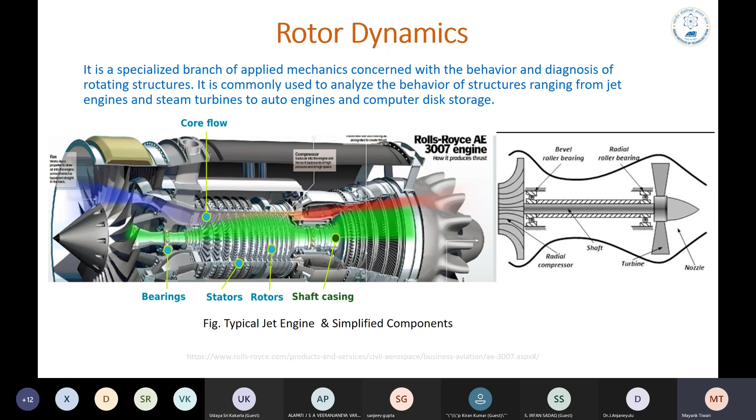So the understanding of nonlinear dynamics in rotors assumes a huge form. Just for a little history, this is from my great master from India, Professor J.S. Rao, late Professor J.S. Rao of IIT Delhi, who guided me on a number of things and guided many people. I have taken this from one of his last lectures with us. He passed away last year.

Rotordynamics history starts from even before Rankine. We all know the name Rankine, 1820 to 1872. It actually started with human beings in Egypt when they started rolling huge logs of stone on wooden logs, so you had something rotating. Rotordynamics started there. But then around 1800, when industrialization was happening, scientists like Rankine studied the rotor.

Then almost in parallel, but after that, was De Laval in Sweden. There is a huge controversy on who made the first power turbine, but De Laval had a huge contribution in terms of the turbine and the rotors. And these were moving at very high speeds, 10,000 RPM at that time. You can see he was born in 1845.

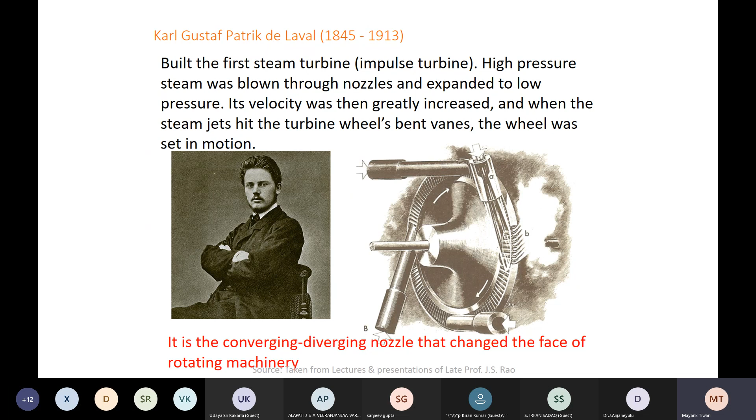By around 1913, we had a very high speed turbine. What happened was that at that point of time it was running, in fact if you see, by 1883, 40,000 RPM. So we had gone to very high speeds at that time.

But when he did this analysis, he found that the displacement of the rotor has this in the denominator, and this can go to zero. This is the running speed, this is the stiffness, and this can go to zero. If we don't avoid this, you can have an infinite displacement. So at that point of time, it was assumed that no system can run beyond resonance, which is what this formula is telling us.

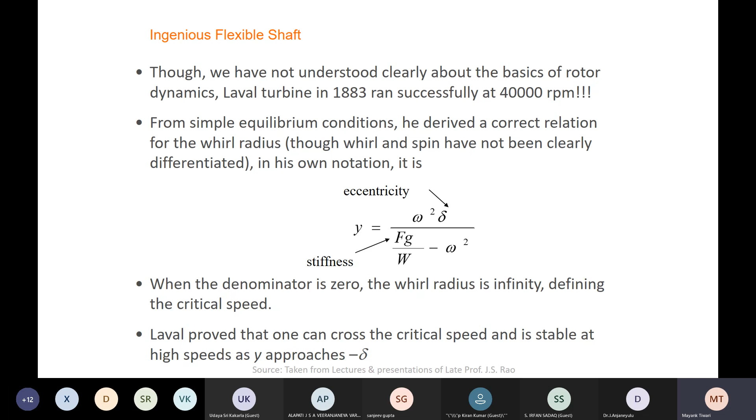It's interesting to understand that many things we take for granted now as impossible in the world may become possible after 50 years. The same thing happened there. In 1883, 40,000 RPM, people must have been running around, huge, very fast thing. Now 40,000 RPM we can have in small machines in the house also, almost, not exactly 40,000. But the point is that technology is growing. Our knowledge, such as what we are discussing now, can lead to the impossible becoming possible at some point of time. But in the 1800s this seemed to be impossible.

Then Parsons, in 1884, at the same time, made one of these turbines. This is another Parsons turbine which you would have seen. What they were looking at was, of course, to avoid the natural frequency, otherwise the amplitude was going high. They wanted systems with low noise and more power production, more torque, and they had to drive a generator basically.

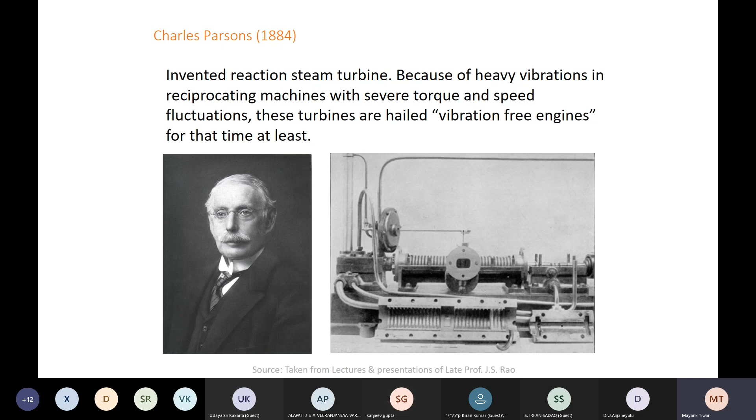So then Edison came along, and of course he set up General Electric and did a lot of things in terms of producing DC. And then there was the controversy of AC with Tesla. But now, one of these contributions was actually electrifying the streets of New York with this turbine and generator. A huge amount of analytical work on rotors was done at that point of time to get these systems running for a long time. It was, I think, called Jumbo, named so, the constant voltage dynamo.

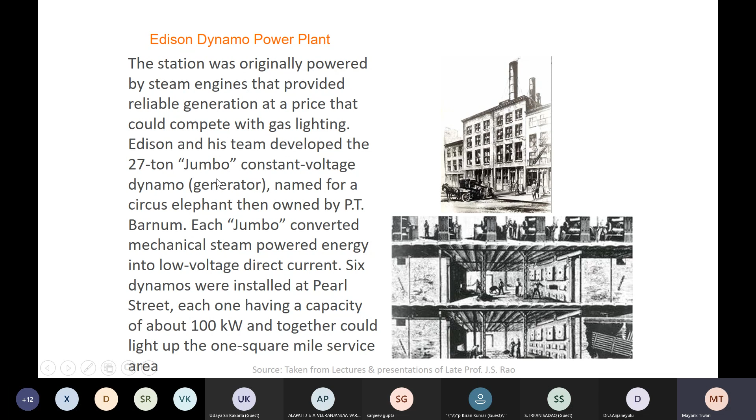This dynamo, this is the picture of that, and this is one of the earliest rotors, a full scale industrial rotor, set up by Edison. And then, of course, in the 1900s technology reached huge levels, and there was a lot of work being done in mathematics in Europe, with things moving very fast.

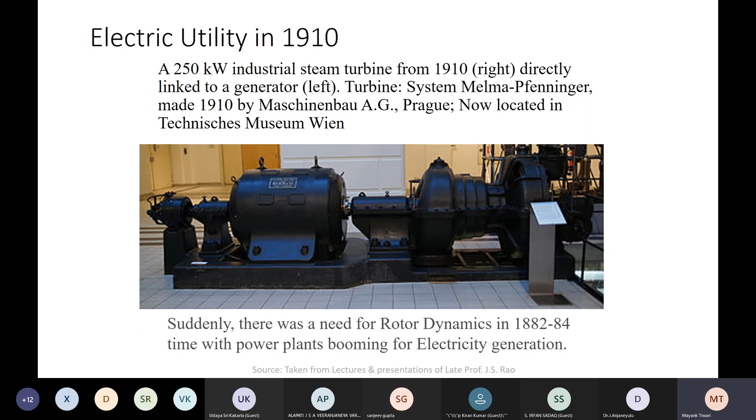One of the bad byproducts was that we started fighting, and there was the First World War and Second World War. It's not good, but we have to really accept the fact that a lot of technology we use now developed through those wars. Hopefully, with this awareness, in future we can develop technology that is not developed through war. This is actually the pivotal philosophy of our country, though we might have forgotten it because we are overwhelmed by American English and Western philosophy as such. But the point is that technology, and rotors, developed through the First and Second World War.

And then you had steam turbines through the 20th century. You can see huge steam turbines. I'm sure if some of you would have visited BHEL or a steam plant, they are being made in India also.

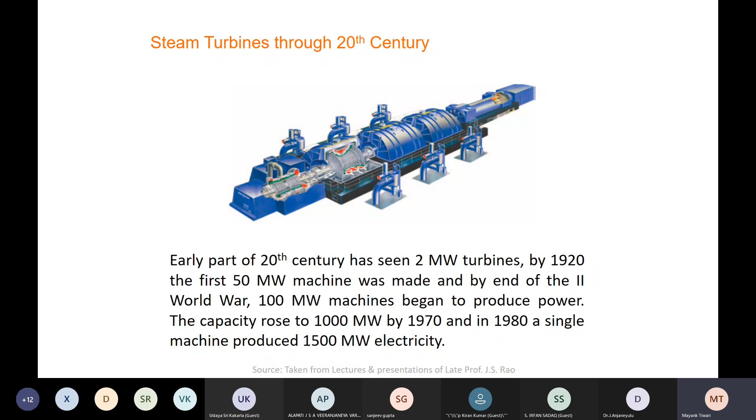And they're of 1500 megawatts, the huge turbines which are running and which need very critical rotor dynamic analysis done. Otherwise, we will have huge amounts of failures.

So we have to appreciate the fact that even in very normal things like motors, it's important to have a rotordynamic analysis, else you're going to have a failure.

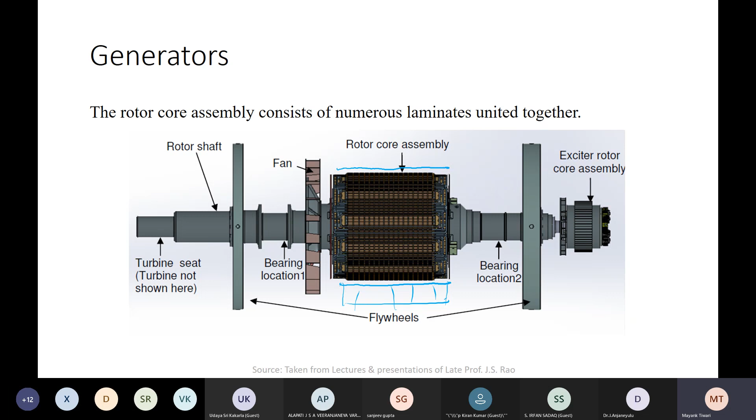Otherwise, it will expand and close the clearance, and you will have huge nonlinear effects due to rub between the rotor and stator, which we are going to discuss in detail in the models later. So, design of a motor, a huge part of it is rotor dynamics.

Then, of course, came 1941. Again, as I said, the war, the Second World War, led to the development of the first jet engine in United Kingdom by Sir Frank Whittle. It's very interesting that although this engine was developed in UK, industrial production of the same kind of engine with the technology developed by Frank Whittle was actually done in United States of America by General Electric.

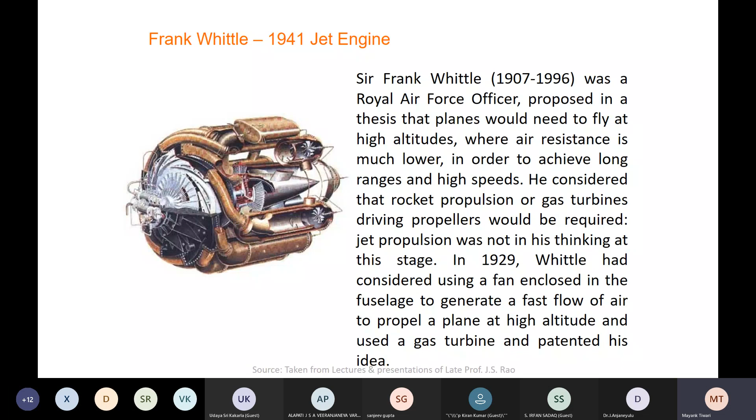So the rotor dynamics actually came of age. Very high speed, very critical, because you can't have it fail up in the air. People will lose life. And then all those developed into these jet engines which we see now.

So this is the Rolls-Royce RB211. Then there is, of course, the GE engine. There is Pratt and Whitney, and a huge amount of technology. You can see the very complicated rotor stator here. There is actually rotor inside a rotor, multi-spool rotors which are there.

And then there is a cantilever part to this, especially the blades which you see here, which you can see if you're boarding an aircraft. These blades, it's like a cantilever rotor with very, very small clearance here. The clearance is almost the size of a hair.

And now if you have vibration going up, you will have these blades running at about 2000 or 3000 RPM, not more than that. They are very huge. They will touch the case. And of course, there is design done to prevent the failure. There is an abradable which is put there, which abrades on touch. But the touch itself is a huge nonlinear dynamic event which will create failure.

And in fact, I will show you a photograph of a failure which happened last year, where the whole engine - there are lots of videos on YouTube where that huge engine just broke apart, a 777, and it was dropping down on the ground on roads and houses. So these are very critical things which have been made.

And the steam turbine, you can see this huge rotor here. This is the generator here. This is the turbine, different stages.

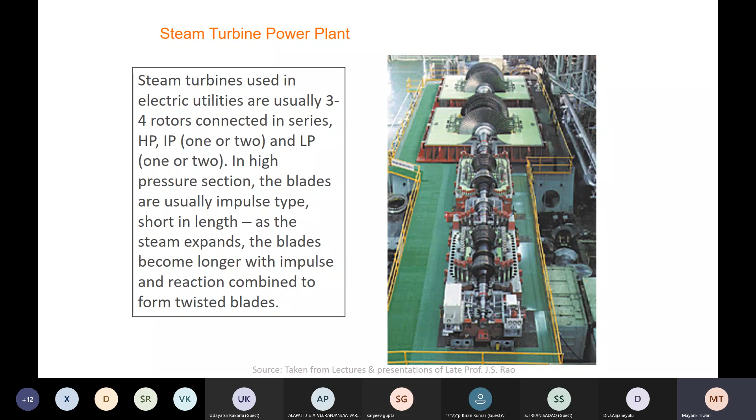So this is again another challenge, but it is interesting that a lot of work has been done to overcome all this. And this is the work, fundamentally, which we are going to talk about today. Now you can see this kind of analysis which has been done on ANSYS, and this is, I should repeat, a slide from late Professor J.S.

Rao's presentation on ANSYS is used to find the deflection and the mode, showing where the blue part, which is the rotor, can touch the green part, which is the stator.

Anyone who's used ANSYS for these kinds of simulations understands how critical damping is. This is a huge exercise in simulation of aircraft engines, because if you don't put the right damping, you might overestimate things.

Then the factor of safety will be very high, and you will have very heavy engines. Heavy engines mean more fuel, more fuel means less money. So that's another fact of life for engineers - we can do a lot of things, but we have to be careful and stay within our budget, otherwise we won't be good engineers.

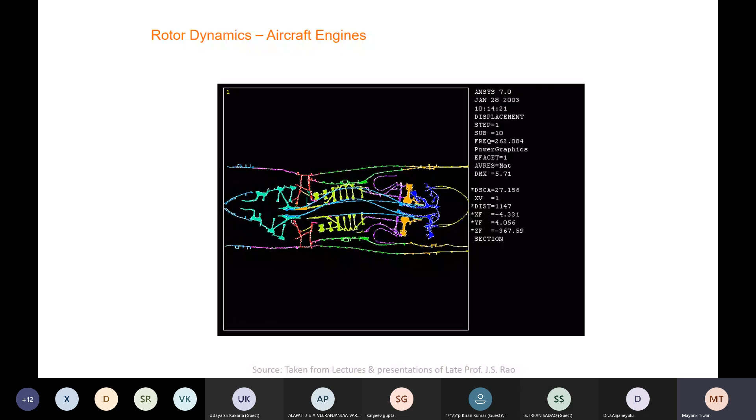That's the whole point of industrial engineering - the engineering in industry. These kinds of simulations have to be cross-checked with a lot of experiments before you can actually finalize a design.

Now, picking up some very interesting things from his presentation - this is the cryogenic spatial pump for the GSLV which India has. This is interesting because this turbo pump is actually pumping liquid oxygen and hydrogen. We're talking of minus 180, minus 173 degrees centigrade, so the bearing and the rotor are actually facing temperatures of minus 173 degrees.

And this is at very, very high speeds - it can go to 50, 60,000 RPM or even 1 lakh RPM, facing such low temperatures. So the rotor has to be designed for this. The life of these pumps at this point is just 2 minutes, because the cryogenic stage actually just survives 2 or 3 minutes in space, and then it is ejected out.

But a lot of work is being done to try to resalvage this, because it's a very expensive thing and we are just throwing it out. That's why space technology is so expensive.

So the bearing needs oil and material which can run at such high speeds and low temperatures. It should not fatigue, because most metals at that low temperature will just harden up and crack. Obviously liquids will just freeze up, so you can't use normal lubrication like oil in this.

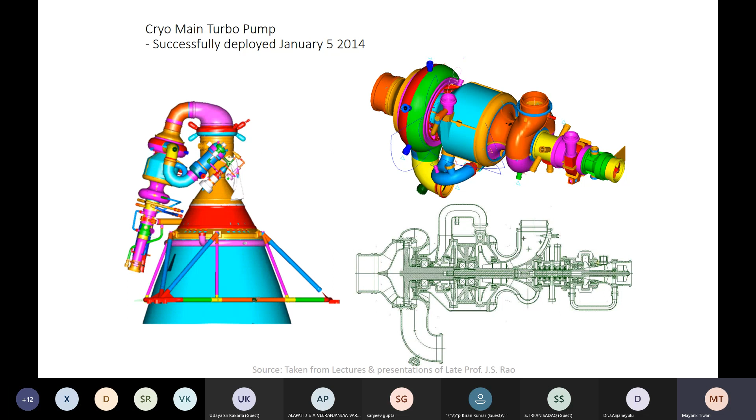So the whole rotordynamics and tribology of this kind of rotor is very important work being done in India. We have a cryogenic stage for the GSLV with us now - this GSLV is, of course, a huge thing which has been accomplished in India.

This is a photograph which I put from Professor Rao's presentation, showing where the stage is, and it is performing very well. We unfortunately had one failure just recently, but otherwise we've had very few failures of this stage in India.

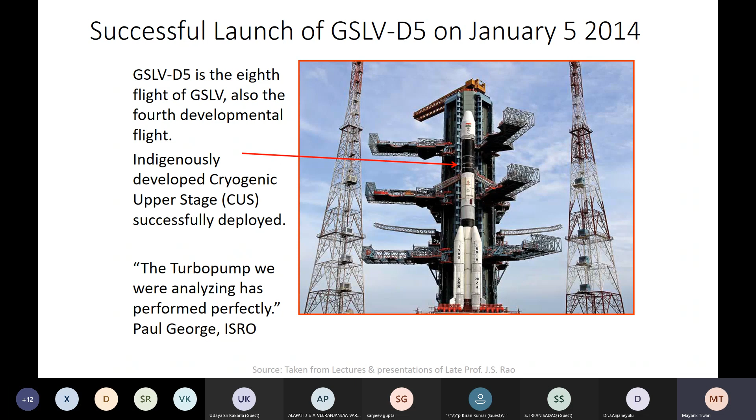You can see these stages as they go - the liquid stages here, the cryo stages here. This is one of the last stages. The liquid hydrogen and oxygen actually mix to produce the thrust, and when liquid oxygen and hydrogen react, they produce water - so that thrust's output is water.

It's high up in the atmosphere, and then it is ejected out, so we lose out on that very expensive technology.

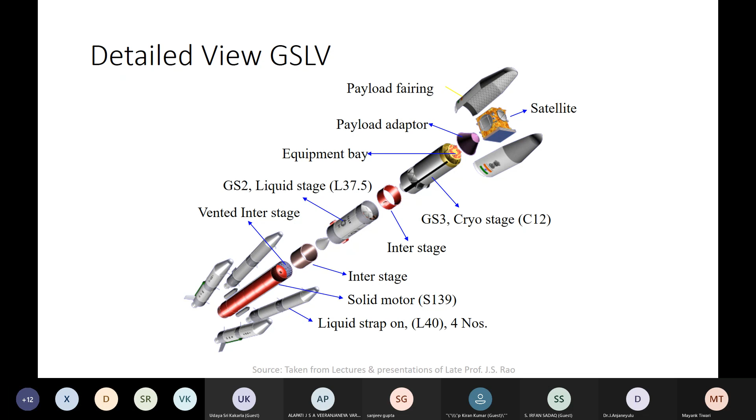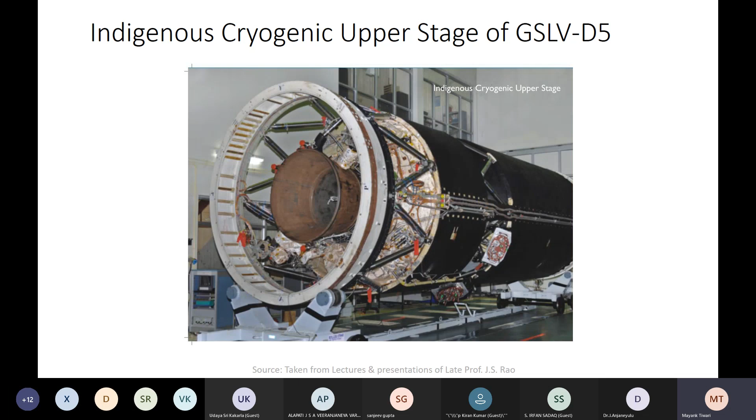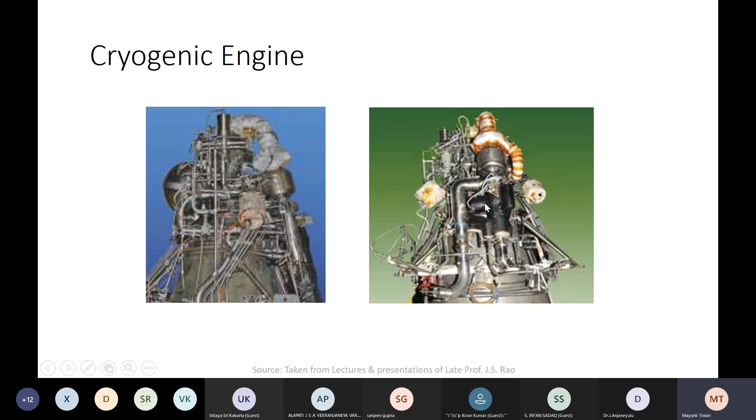These are more photographs, and it's interesting and enlightening for all of us to see these kinds of technologies being worked on in India, especially in rotordynamics. More photographs from the cryogenic stage show the complexity of the fuel and other systems - it's not just a simple rotor, there's a lot inside it.

And then there's a test bed for that, where these tests are done at ISRO to find out the thrust and the safety of the whole engine.

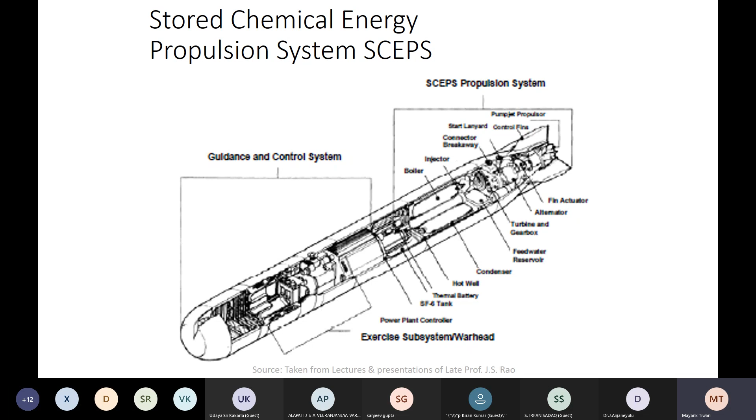As I told you, there's a lot of other work being done. For example, this is actually a torpedo for the Navy, where they use these rotors to propel the torpedo. This is another critical stage, called the Shakti torpedo, which has an impulse turbine inside it. So we get some idea of the history, the importance, and what's being done in our country.

But the FAA standard has gone through so many tests and design that the whole engine is designed to sustain these events, and the engine should not fall off. The cowling and casing fell off, but if the engine itself falls off, the whole aircraft will go through a huge unbalance and might crash.

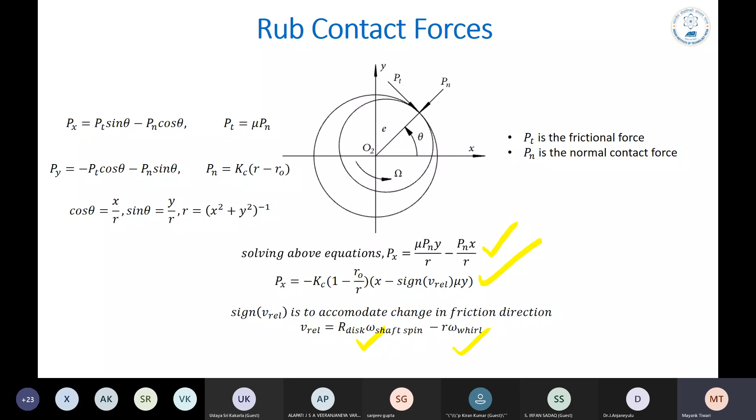But it is also whirling, like the Earth going around the Sun. So these two combine to give you V-rel, the relative velocity of the rotor with respect to the stator. Now when you put that here, going back to this equation, you will get this V-rel.

As you can see here, V-rel is in this term, in this equation. The sign of that will give you the sign of the friction force, which is mu y. So we now have a set of equations.

The problem is that this Heaviside function has an issue. It has 0 or 1 as its value - it's 0 when the rotor is not touching the stator, right? There is no touch, there is no very high stiffness, so that term is 0. But once it touches, it becomes 1 and that term comes in.

So this 0 or 1 actually causes very strong nonlinearity. It is the on and off nonlinearity, switching on and off, which is introduced. And this has no analytical solution, as we know with nonlinear equations.

So is there some way we can make it analytical? Number one. Number two, because of the non-analytic nature, we can do only things like solutions with Runge-Kutta method, which actually introduce inaccuracy, and they are not trustworthy till we verify them experimentally. So this discontinuity leads to very high computation times and leads to inaccuracy.

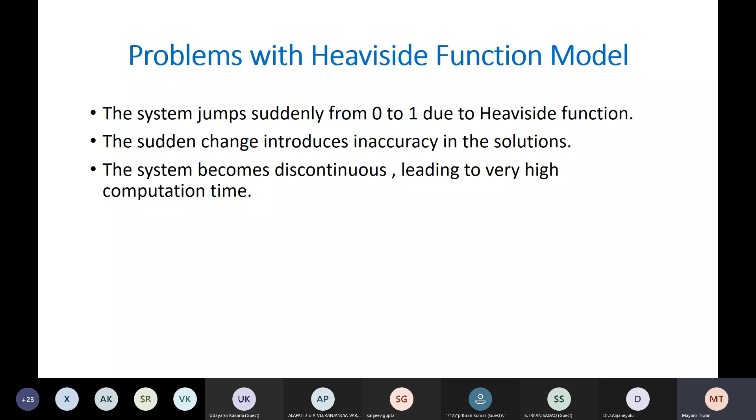So one of the problems we worked on is to make these functions into some known analytic functions. One of the known analytic functions - and I'm not saying this is the only one, there are others also - is the tan hyperbolic function.

So one of the things was to study if we can put this smoothing function into our equations and see if we can have a model where we can do it analytically, or which can take less computation time.

And then we see that very high k, at 1000, is when we get this. So this is an exercise which was done. We published a paper on mechanical systems and signal processing on this - that if we have a very high value of k, we have a configuration of this term which is analytic and takes less time.

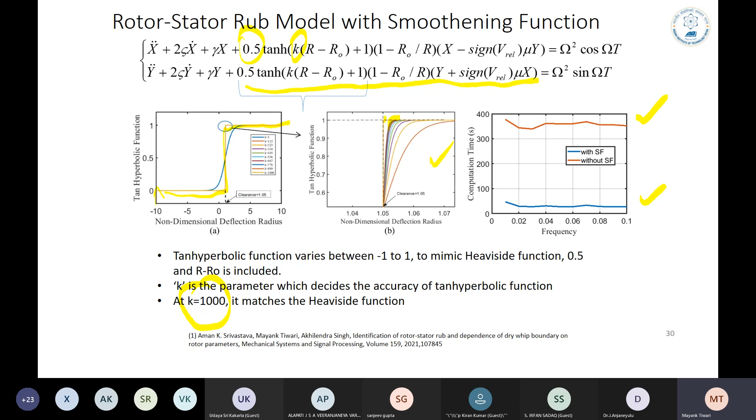So the point is you have to be very careful, because sometimes by using a smoothing function you can lose out on information about the nonlinearity. So the smoothing function has to be optimized for this kind of problem. So now, what is the result of all this?

This partial rub will create a condition of this orbit, where the rotor will touch the stator and come back. So there is bouncing taking place, and this creates this kind of orbit which looks like an annulus, a circle within a circle. It is actually the rotor moving, bouncing off the stator, coming back again where R is less than R0, then again it goes back and hits the stator. So this is partial rub, and what it shows us is the frequency spectra.

But the important thing here, for this frequency spectra also, all three, is that you can see the frequency which is zero here, and it is positive till here, and there is a negative side to this frequency. This is a special thing used in rotor dynamics, and it's called a full spectrum.

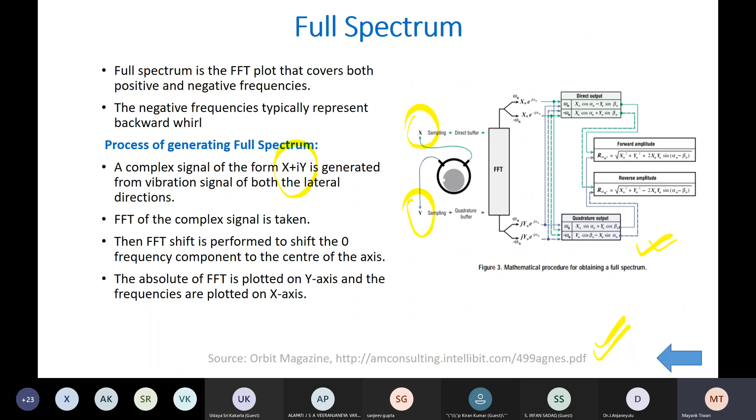This X and Y can be put down in complex form as X plus iota Y. Then the FFT of the complex signal is taken, and then FFT shift is performed to shift the zero frequency component to the center of the axis, and the absolute value of FFT is taken, and then you get a full spectra.

What it tells us physically, the important thing is that if you have components on the negative side, which is the backward whirl. Now what is the backward whirl here? You see this frequency, this is on the negative side. That means the rotor is vibrating with a negative motion, it's called a reverse whirl, and this is pretty prominent, but it is less than the forward whirl, which is the positive side.

So you will not have a net reverse whirl. You will have a net forward whirl, which will not be as strong as in this case, because it is being reduced by the backward whirl.

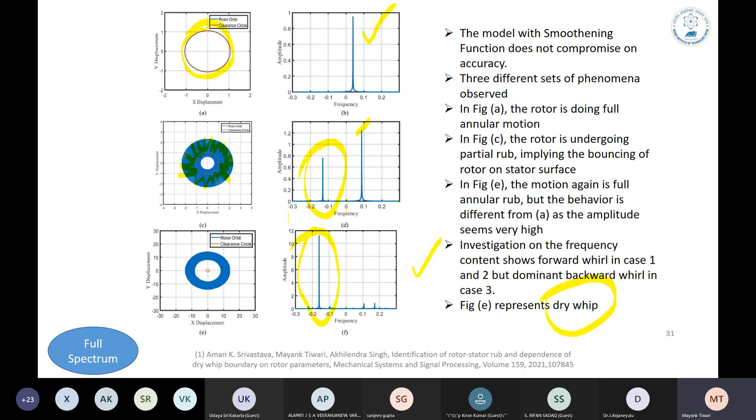Now when you have full rub, which is the third case, that is when the rotor completely touches the stator at very high amplitudes and it doesn't let go. There's no bouncing actually, then you will have a net backward whirl because you can see a strong component of reverse whirl which is happening, and this is called dry whip. This is a term used during rub of the rotor with the stator, it is called dry whip.

Now this is analyzed using one of the methods we've used, the adaptive chirp mode decomposition, which takes the time signal, and what we know is that there is frequency modulation, not amplitude modulation. So there is frequency modulation, and we have to find out what frequencies are modulating. This signal processing method finds out the modulation and how the frequency is changing with time. So this is an estimate and this is the real.

When this difference goes to zero, this function is minimized. So if we minimize this function for a given frequency, we will know at a given time what that frequency is.

Just for a little understanding, what is frequency modulation? If this is time and this is amplitude, frequency modulation would be if the time domain plot would be like this, closer, then again further apart. This is frequency modulation because at some time you have one frequency, at another time you have a larger frequency. This is different from amplitude modulation, which would be the same frequency but the amplitude modulating.

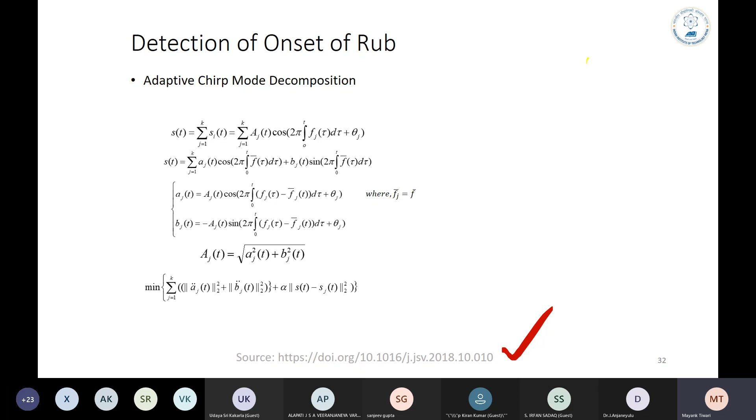This is taken from good work published in the Journal of Sound and Vibration. This is not our work, we've taken this for using it in our rub model.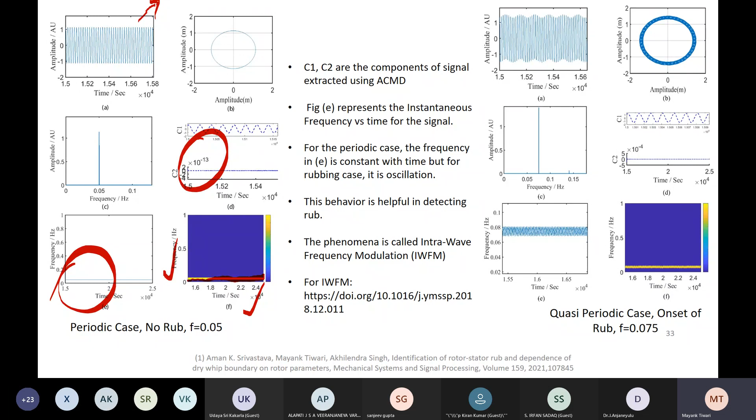So how do you find out a system has become unstable, especially a nonlinear system? One way is by Floquet theory, which many of you would have done. If you have the time domain response, you perturb it by y(t). This perturbation gives us a new equation in state space form, and you run a Runge-Kutta on this with the initial condition as the unit matrix of the size of this state space, and then get this, which is called the monodromy matrix.

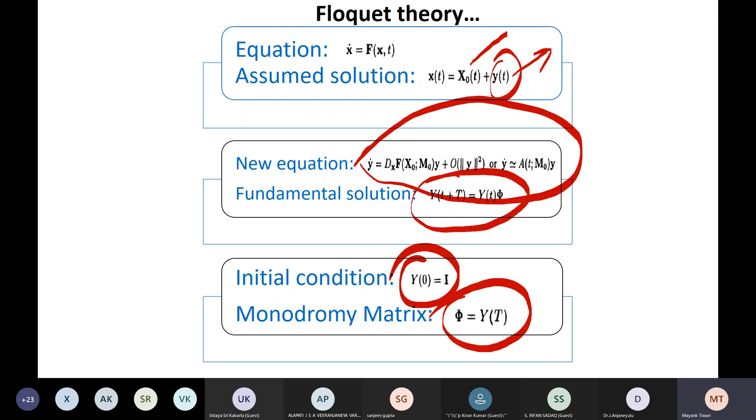The eigenvalues of this matrix, with the initial condition as the identity matrix of the order of the state space system, give us phi. The eigenvalues of phi now give us the idea of stability. This, in a nutshell, is the algorithm for stability analysis of nonlinear systems. The eigenvalues of this monodromy matrix are called Floquet multipliers.

They tell you whether your system, which you can see plotted with X and Y vertical, is running in time, and this dimension of time is very important for us in dynamics. So any orbit, if I draw another picture, the orbit of a rotor would be like this - it won't be a closed circle, but a spiral. When you see it from this side, you will see a circle, or two circles, which tells you there's another frequency.

So this Floquet multiplier is telling you that at any instant of time, if this starts increasing, it starts becoming unstable. This gradient of change is the orbital convergence or divergence, which comes out from the Floquet multipliers. After we find the eigenvalues of the monodromy matrix, if they lie within a unit circle, the system is not diverging, it is not unstable. If it lies outside the unit circle, it is diverging and becomes unstable.

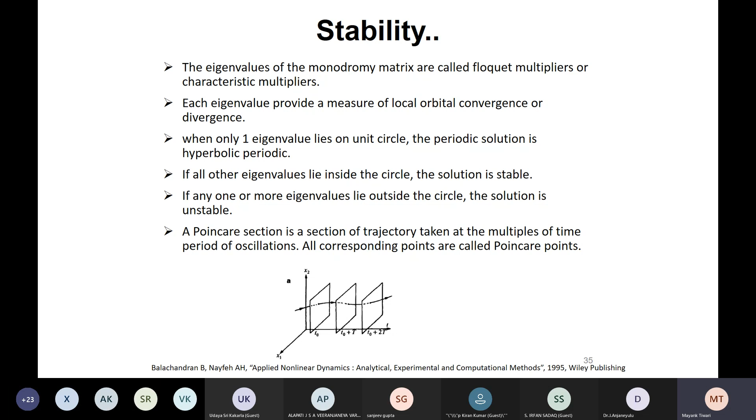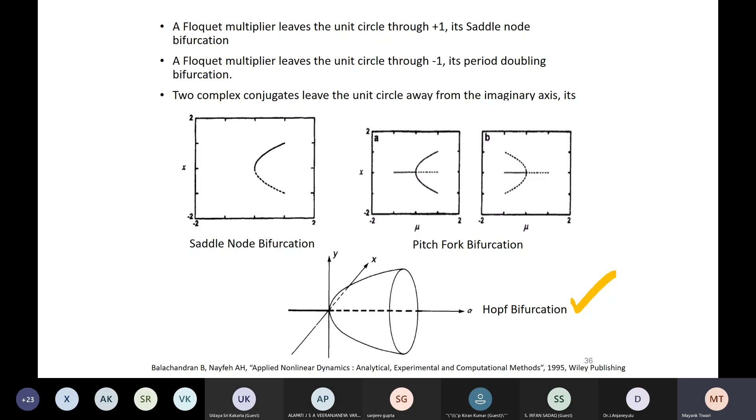So the conditions in the algorithm are: if the Floquet multiplier leaves the unit circle through the plus one side, it's a saddle node bifurcation. If it leaves through minus one, it's period doubling. And two complex conjugates leaving from the imaginary axis is a Hopf bifurcation - which is the case for us in the rotor stator rub.

So this is explaining the eigenvalues of the monodromy matrix, and if they go out through the negative side, you can see the complex conjugates there - the imaginary axis on the y and the real axis on the x. You will see a case of Hopf bifurcation, which on changing the speed or some parameters, will finally lead to a chaotic response.

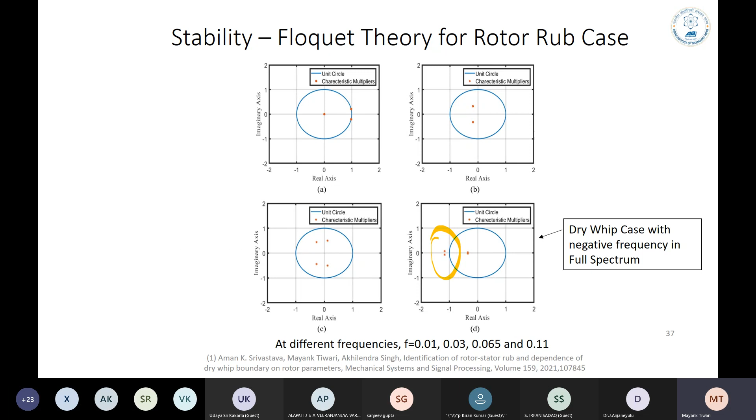These plots are actually from the results we've run for our case. The whole point of this study is that it's very important to avoid this kind of unpredictable behavior. Actually, chaos is in a way predictable, in a way unpredictable, but it's not a random thing, right? It's not noise - we should not say chaos is noise.

That is the problem with application of nonlinear dynamics in diagnostics. If you go into an industry and start talking about chaos, people get very alarmed because it is very difficult to detect chaos in general. And the second issue is most of the problems are noise, so they will say just reduce the noise, which is the amplitude, forget about chaos.

But there are industries like aircraft engines, the aerospace industry, where after you have reduced the noise, you have to study whether it is chaotic, quasi-periodic, or periodic, and then go and modify the design. So the whole purpose here is to study the chaos with the noise, and then increase the distance between the main frequency and the nonlinear frequency, which I showed, called the dry whip onset frequency - the gap between that is causing frequency modulation.

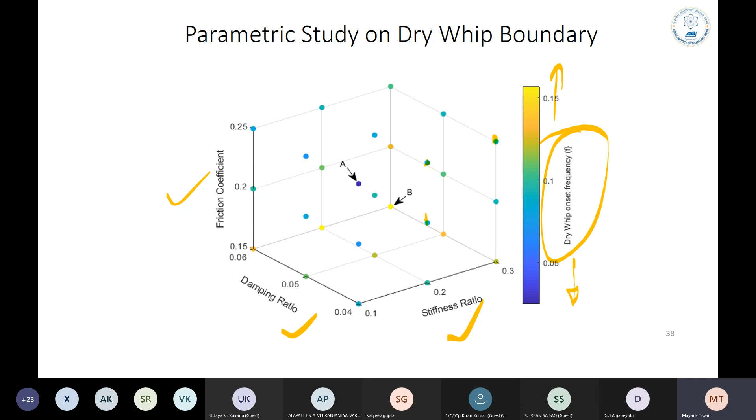So this is a very good 3D parameter plot which has been made by my student, who's published this paper, and it's a very good design handout for an industry where they need to have damping, stiffness, and friction coefficient for a rotor which can touch a stator, so that we can avoid unpredictable responses.

So, talking about chaos in nonlinear dynamics, we need to understand what is the effect of noise, and also how can you separate it. Separating noise from nonlinear response is very difficult because the usual methods of filtering will take the data you acquire, apply filters, and as a result, the nonlinear dynamics will also be destroyed. You will never come to know whether your system is quasi-periodic or chaotic because you applied a filter. You might have reduced the amplitude and said that everything is noise, but that is not true.

So this is another exercise which we are undertaking, finding out methods such as the 0-1 test for chaos, looking at the fractal dimensions, and then using some visual representation to see what kind of nonlinear response we are having.

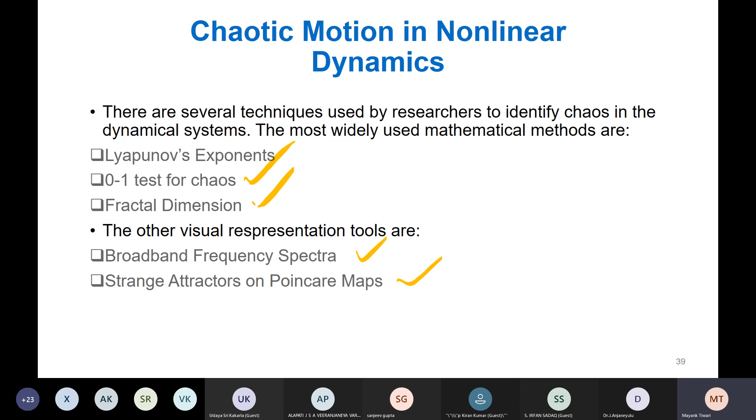So Lyapunov exponent, as I told you, tells you the convergence or divergence of the trajectory of the system in 3D in the real world. It is given by this exponent lambda. If this is positive, then lambda, the Lyapunov exponent, will diverge. If this is negative, it will converge.

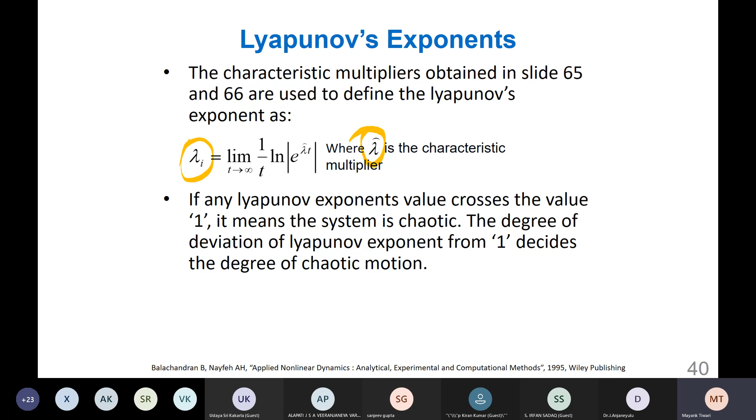So you can understand from the basic definition of stability, a positive Lyapunov exponent is indicating instability, and the larger the order of this Lyapunov exponent, the stronger is the nonlinearity. So if your Lyapunov exponent is something like 100,000, you have a highly chaotic system. If it is 1 or 2, it is chaotic, but it is not that strong.

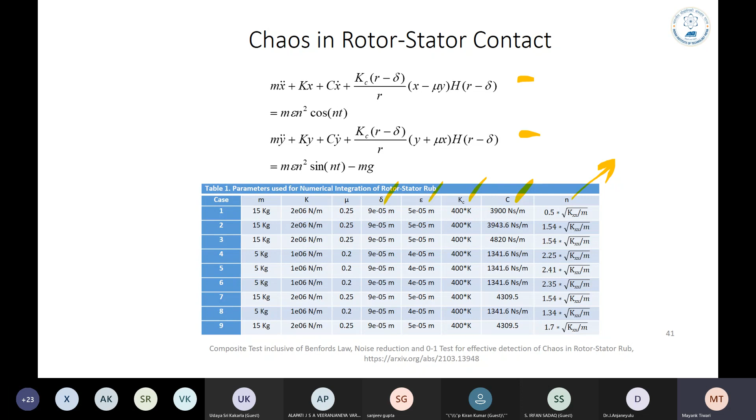Okay, so we took some parameters of mass, K, mu, clearance, the eccentricity of the unbalance. Then we took the stiffness of the stator and different values of damping and different rotational frequencies from these two equations of a rotor, and ran all these methods to find out what different kinds of responses we get.

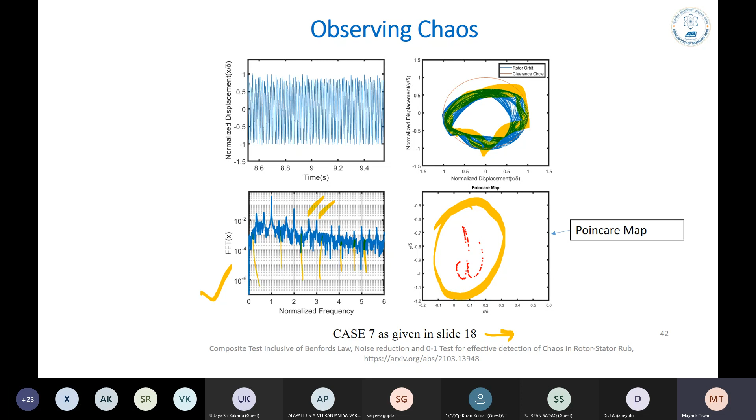Okay, this gives you partial rub chaotic motion where you have these prominent frequencies, but in between here you will see a band of frequencies. So many times, when you do this simulation, you will confuse this to be numerical noise. But actually, if you plot the Poincare map, you get the very characteristic fractal or layered structure of chaos. So this is a visual representation for the cases we ran for the chaotic system, and this is of course a simulation.

Now, as I said, when you do diagnostics of rotors and talk about chaos, people won't take that so easily, because the reality is that there will be noise in the system. So if there is noise with chaos, what are the systems to detect it, especially in algorithms? There's something called the 0-1 test, which is used in physics. Physics deals with a lot of applications where there is a huge amount of nonlinear dynamics, right from very huge scales in astronomy to small scales in atoms and subatomic particles.

So this 0-1 test was actually formulated in this paper from the SIAM Journal on Applied Dynamical Systems. It assumed that noise and chaos are the same, which is not a good assumption, of course, because that is what we are trying to differentiate.

But what it does is, if you have a given set of data, without going for very expensive Poincare maps — by the way, Poincare maps are very expensive because 1 million sets of data will produce one Poincare map, and a huge amount of computer resources are taken — can we just have time domain data, do some test, and find out whether it is periodic, noisy, or chaotic?

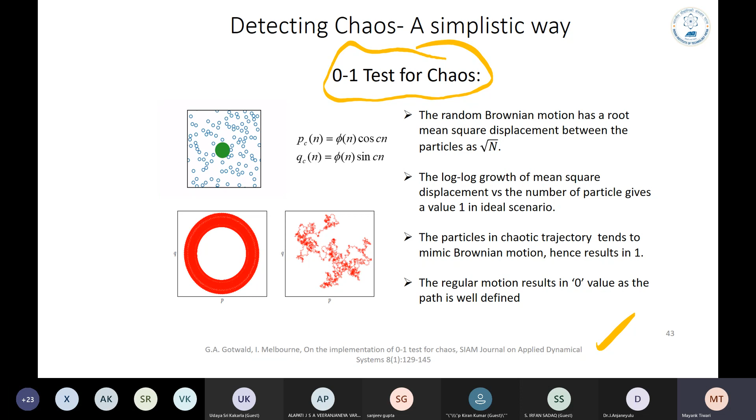So that differentiation, this 0-1 test for chaos does. If it is 1, that means it is either noise or chaotic. If it is 0, it is periodic.

When we do this test, the limitation is that we found a set where 1 means it is either chaotic or random with noise. The problem with this method is that if we have a periodic motion with noise, we will see something like chaos, but that is not true. This is a quick method of understanding whether there is chaos, quasi-periodic motion, or noise, but it is absolutely not sufficient for us because we can't equate noise with chaos. If we are trying to reduce chaos or quasi-periodic motion, we have to work on design features which are not the same as those for noise.

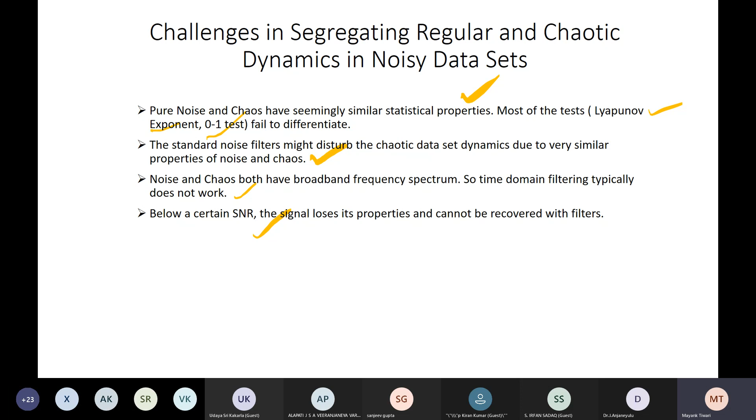Now we will try to work through the challenges. The challenges of noise and chaos are that they have similar statistical properties, and most of the methods we discussed, Lyapunov exponent, 0-1 test, fail to differentiate. The standard noise filters will completely destroy the chaotic data, and you will never be able to know whether it is chaotic or quasi-periodic. Also, they look the same, noise and chaos. They have broadband frequency spectra. Below a certain signal to noise ratio, the signal loses its properties and cannot be recovered with filters. This is the important thing.

So what do you do now? We do something called a composite test for chaos. This is another paper which has now been published in Nonlinear Dynamics from our side. We get the Poincare map and perform the 0-1 test. If it is 1, that means there is either noise or chaos or quasi-periodic motion. We find that out in this box, whether it is chaos, through this method which we will see in the next slide. We calculate the Euclidean distance, ED, and there is a certain box we generate, which we'll see in the next slide. If it is outside, it is non-linear.

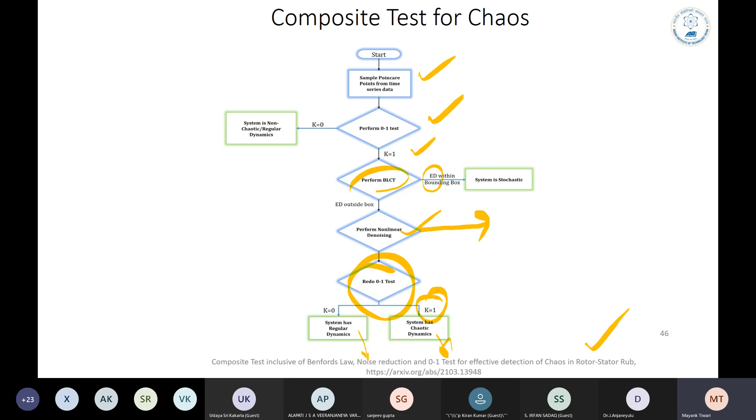Then we do nonlinear denoising. This is a method taken from physics, from Schreiber. It is called Schreiber's filtering for nonlinear systems. Then we redo the 0-1 test. Now this method renders the system data devoid of noise. Either it is chaotic or periodic. Once we do the 0-1 test now, if it is 1, it means it is chaotic, and if it is 0, that means it is periodic motion.

This is a method which we've applied in our algorithm, and that test is called the Benford's law test. Now this is an interesting method because Benford's law, you would have heard of it in the news for things like the American election last year where there was so much controversy. They were taking the data to find out whether it is actually noise or somebody's tampering. This was the problem in America, that one party was claiming the whole votes had been tampered with, something we used to hear in India some years ago. So then Benford's law, and this we found in a news report, they were applying Benford's law to find out whether it is noise.

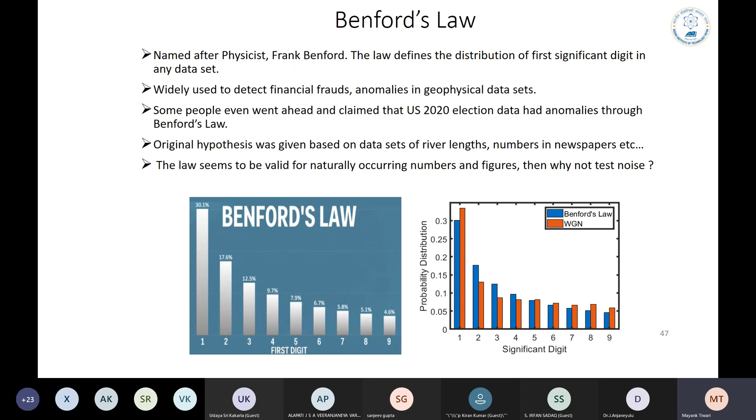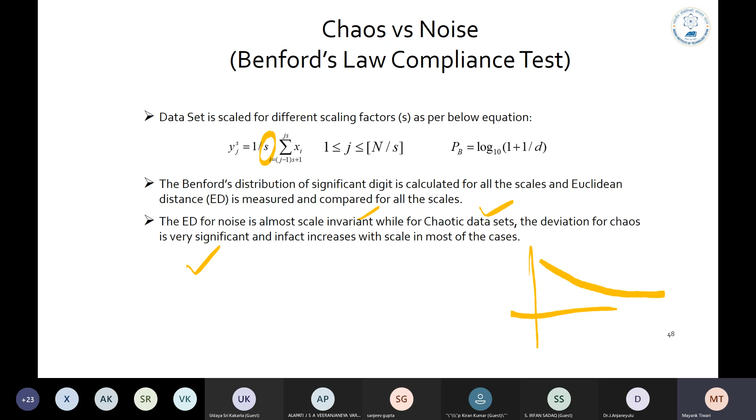So we applied this Benford's law on our noisy data. What this method tells you, and you can easily go back today and check this, it's a very simple law being used, is that Benford's law, if applied on noise, is scale invariant. So if this scaling is done at different levels, you will get the same shape of the Benford's distribution, which is, as we saw in the previous curve, the amplitude falls down like this. The Euclidean distance for noise is almost scale invariant, while for chaotic data sets, the deviation is very significant and increases with scale. So Benford's law is another method for checking out if your time domain data from the rotor is noisy or has a chaotic set.

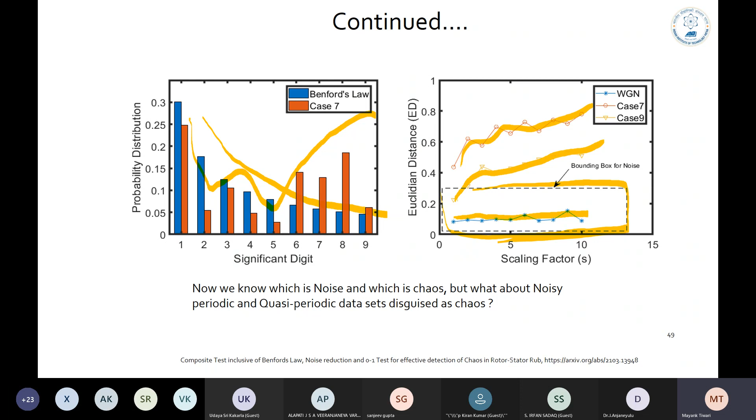Also, what we do is find out the Euclidean distance of these curves. If this Euclidean distance remains the same, scale invariant, within a box, this is called the box technique, then we say it is noisy data. But if this Euclidean distance changes with the scaling factor, scale variant, then it indicates chaotic data in your system. So this is another method, the BLCT method, which we've applied.

Then I explained to you about Schreiber's nonlinear noise reduction, where we have applied it to a Poincare map. As you can see, this is seemingly chaotic data. It is true that it is chaotic, but with this kind of plot it might look like some continuous curve also, but it is not. Once you do nonlinear Schreiber's method for denoising, you will get this fractal, layered structure of a chaotic response.

This tells you that we need to do nonlinear noise reduction not in the original data but in the Poincare. If you do any kind of filtering in the original data of the rotor, you will end up with completely distorted data from which you can extract nothing. So you have to be careful.

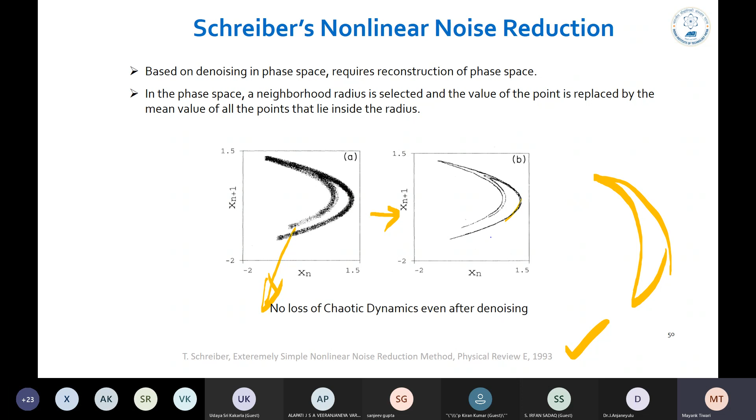Again, a method which is used extensively in physics, it's in the Physical Review journal. Okay, so here's an example. There's a Poincare map we got with noise. It doesn't give any indication whether it's quasi-periodic or chaotic.

We applied the denoising and we saw this. This is a quasi-periodic indication, a closed loop like this.

We applied it to another set of data and see what we got - a single point, which means that it is actually a completely periodic system which looked like some noisy, chaotic, or quasi-periodic system, but by applying this technique, this is...

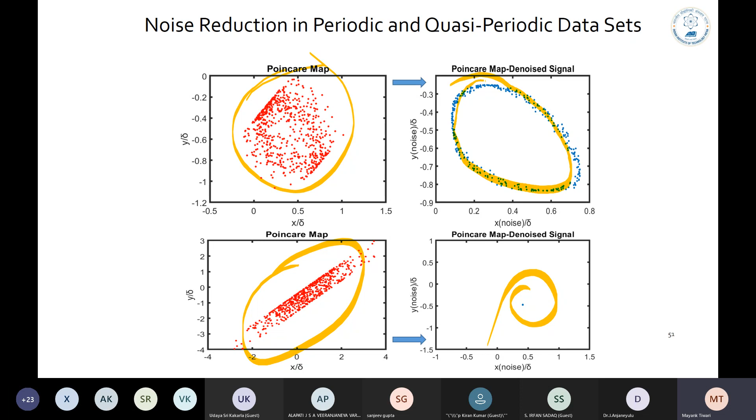Periodic. So this method also has to be used in condition monitoring of rotors for critical systems where we need to understand whether the system is quasi-periodic or chaotic. So if we sum up the composite test...

Then we have the Benford's law compliance test, the boxing which I told you - boxing means the bounding box - and then the 0-1 test, and then the signal mixed with noise. We need to do some nonlinear filtering of this.

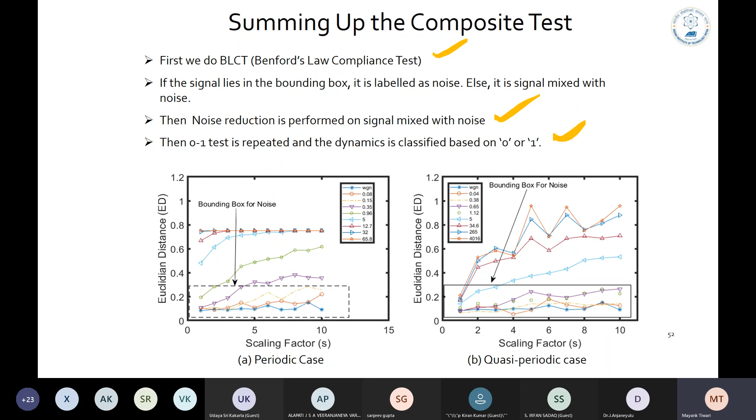Now there's a huge lot of areas where this is applied, not just for rotors, but components of rotors such as gears. Gears are systems which have time-varying stiffness, and this is a work I have taken, a slightly old work, but excellent work on gear dynamics, both theoretical and experimental, from Professor Kahraman of Ohio State University, where they have modeled this as a time-varying stiffness.

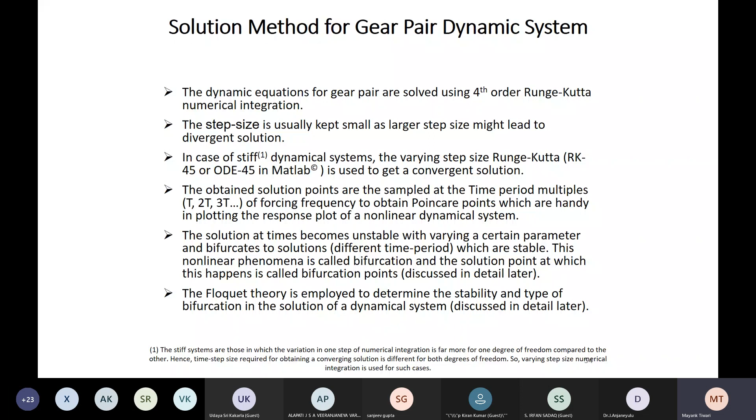This leads to huge issues in terms of the prediction of the response using the Runge-Kutta method, which, as I told you, will not by itself stand verification. It needs verification with an experiment or some other method. But this time-varying stiffness leads to, in fact, they've done some very good experiments also with this rig.

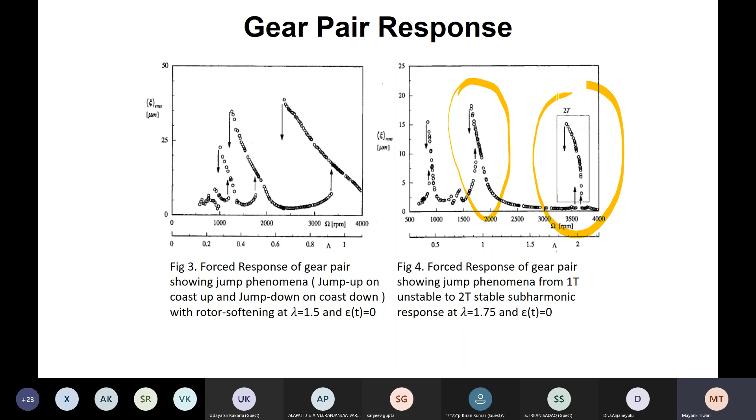It leads to the very interesting jump phenomena in nonlinear dynamics. They have shown this at different subharmonic levels. It is jumping, and you can see with great detail they have got the main frequency, the nonlinear frequency, similar to what we were getting in rub.

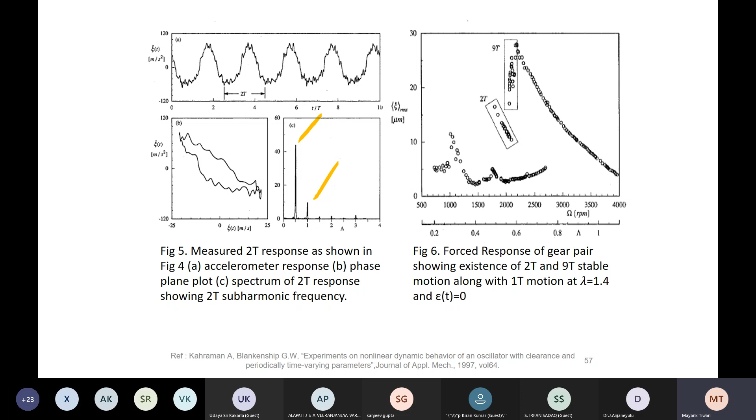Although rub is also a case of partial rub when the stiffness is changing with time. But this is a parametric system which we are dealing with, similar to a ball bearing system, which we'll just see. So this leads to a chaotic response.

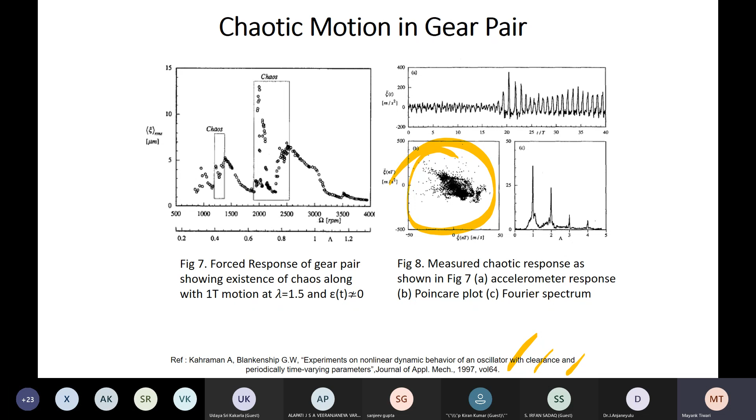And in 1997, no Benford's test, no 0-1 test, no nonlinear analysis - this has not been done, what we are doing now, in finding out whether this is really chaotic or whether this is quasi-periodic or periodic, maybe. It looks like chaotic - of course, you can see this frequency spectra, broadband.

So this leads to a very interesting thing in nonlinear dynamics of mechanical systems called intermittent chaos, which is very common for fluid dynamics. You open your tap slowly, a water tap, and you will see...

Very smooth flow, and then as you keep opening it, the fluid flow breaks, and then it again becomes smooth, breaks, again becomes smooth, right? This is probably an experiment you've done with your taps, or you would have thought about it. This is called intermittency.

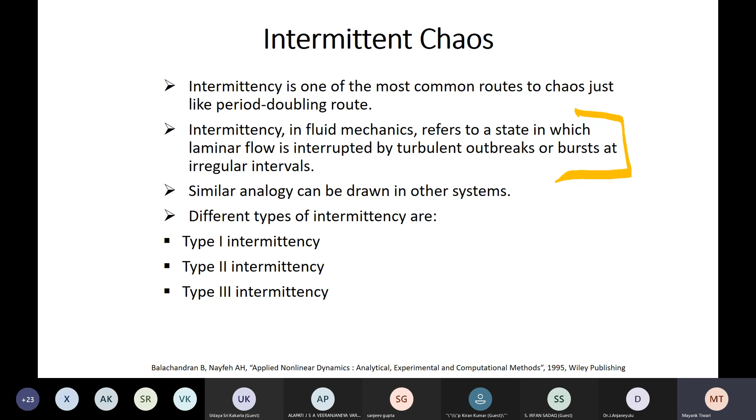So forget about fluid dynamics - even in systems like gears and bearings, it exists. You have a response where you have a chaotic response, then there's a steady state response broken by chaos, again becomes chaotic.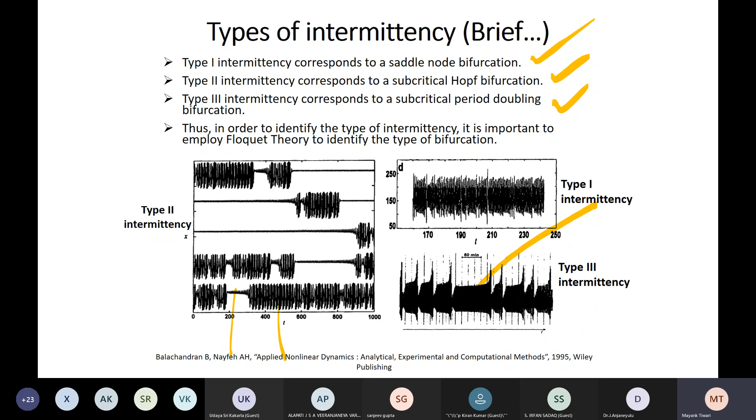So in time, there are different kinds of intermittencies which are defined from the Hopf bifurcation we were dealing with. This was detected by Professor Kahraman in gears, and I saw it in bearings from my own work some years ago, in ball bearings also, mostly from simulation.

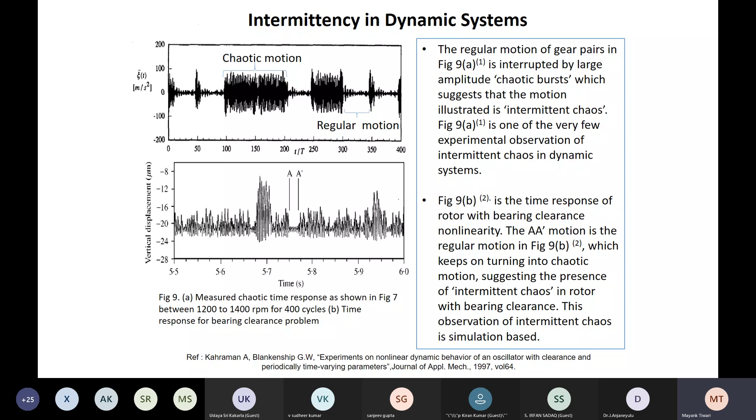You can understand from this kind of signal how much noise and vibration, and a problem in terms of fatigue life, this will create. So we have to avoid this. We have to avoid the set of parameters which results in this kind of motion. And this is true for ball bearings.

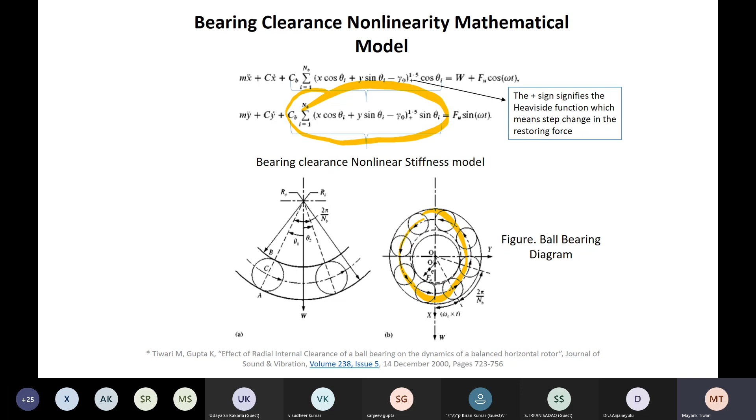This is my work actually some years ago, my PhD work. So you have these balls going around, and you get this stiffness which is a function of time, similar to the gear system, where it is a parametric system. We tested it with Runge-Kutta and the harmonic balance method.

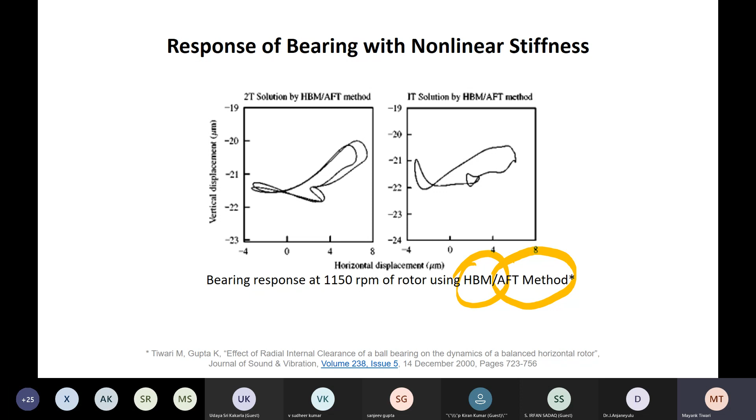So we saw intermittency theoretically in ball bearings. Now, going to some more application, sources of nonlinearity.

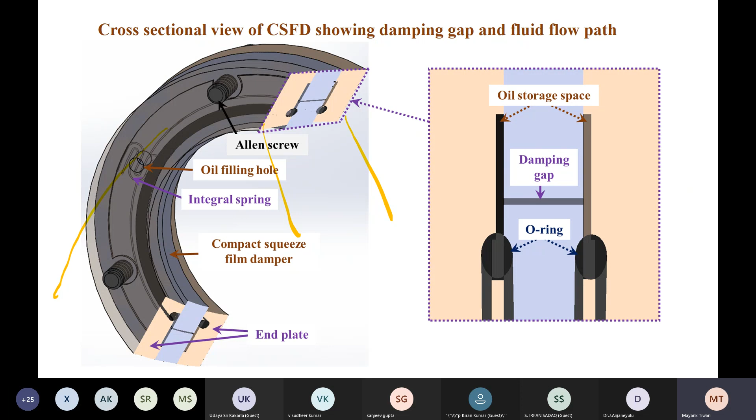We found that if you don't have the optimal clearance and thickness - this is the thickness, see the next slide, and the clearance is of course this small clearance here - if you don't have the optimum, you will get a nonlinear response.

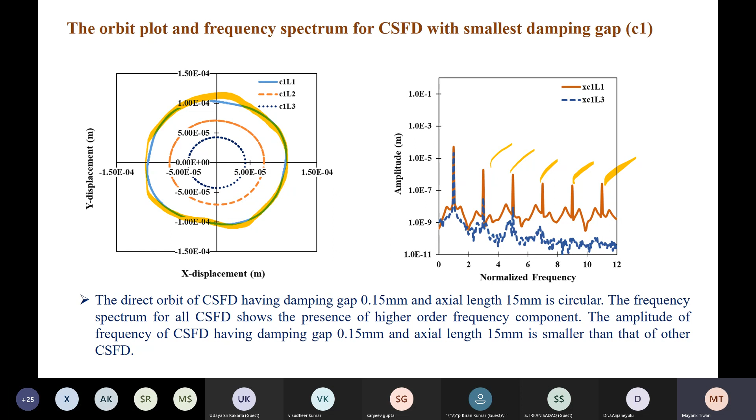Where we have these 1x, 3x, 5x, 7x, leading to orbits which are not circles actually. We get these very non-circular orbits, almost rectangles - look very strange, but this is what is happening.

And then if we change and make the combination of clearance and length more, you get a very high level of nonlinearity, where the orbit is almost like a rectangle with smooth edges. So this covers various sources, and there are many others, but this is some example of nonlinear sources which we worked on.

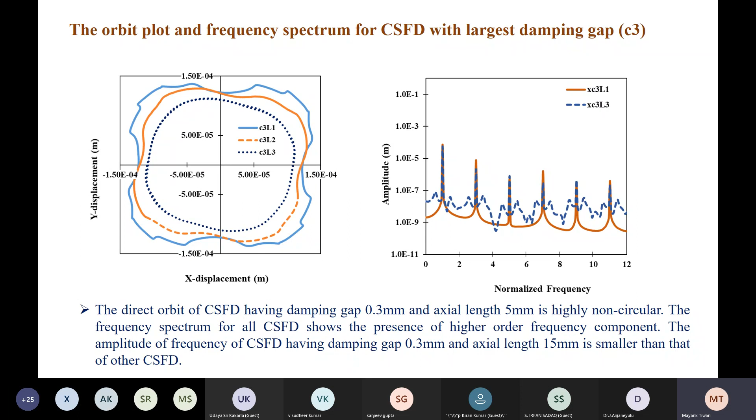If I can just conclude, there are just four points, but it gives you that there is a huge lot of work required, because rotors are very important for technology at this point of time. There can be a lot of sources of nonlinearity in rotor systems, and study of vibration and its dependence on parameters from these critical systems is required for avoiding dry whip chaos.

And then removing noise from chaos is a difficult process, but it is important. Otherwise we'll miss out important things in the data, and we'll either be overestimating, making high safety factors, or making our life also very boring, because we won't be dealing with interesting things, and it will just be a usual routine of work without innovation.

Because when we can go into the details of this kind of analysis is when you will be able to innovate and think of new things.

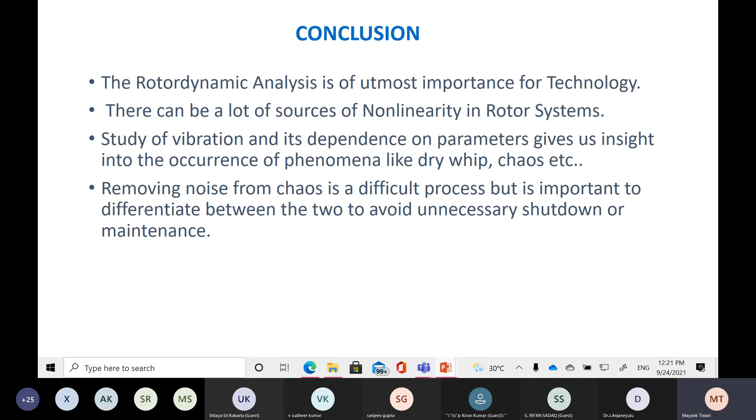Sir, in a very simple sentence, how to differentiate between chaos and noise? As I've said in this presentation, chaos looks like noise, but it has a certain feature which is predictable, that layered structure.

You can see this layered structure here. It is not going all over the place like noise, but it is falling along some lamina. So at time t it is here, at time t1 it is here, but close to this line. So there is some predictability we have.

Noise is generally coming because of extraneous sources, like noise through the ground or aerodynamic noise, but the chaotic response is mostly coming because of the inbuilt parameters. So you can reduce chaotic response only by design changes, changing the stiffness, changing the damping.

But noise in general can be changed by changing damping or isolating the structure, or removing the extraneous sources. Okay, let us say it is chaotic plus noisy both, and you run the system.

So you think it is noise because of the surroundings, so you isolate it, maybe put it in vacuum. Then you isolate with dampers, but still you get something. That means it is going into some nonlinear response, where the internal dynamics of the system is creating this kind of response. So the two are different.

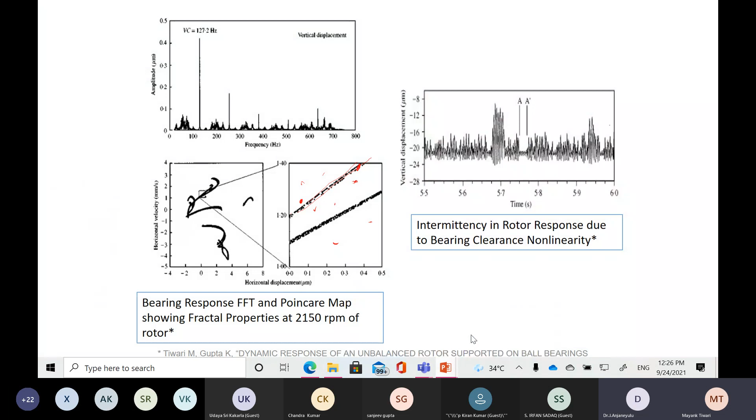Yeah, I will try to draw. Hopefully it comes out well. Just a minute, very short drawing. Okay.

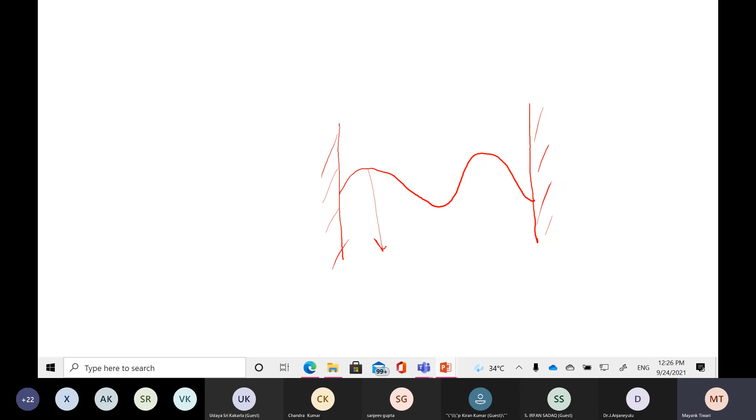Any vibration we talk about is, let's say there is a string and there is another wall, and we give energy to the string, so it will vibrate like this, moving up and down. This is a traveling wave.

This point will go down, this point will go up. So each point has a motion from amplitude, mean, and the opposite amplitude. This is a traveling wave which is traveling with a certain speed. Now it hits a boundary and reflects back.

So you have a reverse wave now. This reverse wave will in general go back like this. Now if it is in the same phase as this, the two will actually magnify. If it is in opposite phase, it will lead to a standing wave. You will have points like this which become nodes, and these cells become antinodes.

Now these are standing waves, which are the general vibration system we take. But for some very specific vibratory systems like rotors, the two are not in the same phase and of the same magnitude, so the wave is always traveling back and forth. There is always a traveling wave, which means the rotor, if we see, has a whirl. So this is your rotor, it is whirling.

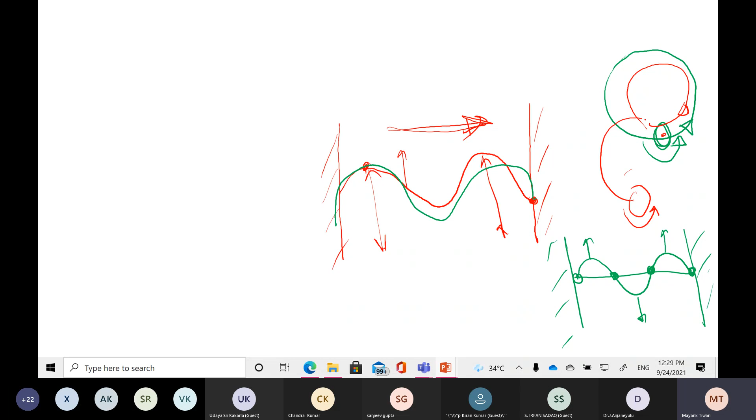But there are applications, especially unstable applications, where the rotor rotates like this but whirls in the opposite direction. This is called backward whirl, and this is the negative frequency backward whirl, and it is an unstable state. If you perturb this state by a little amount, the whole rotor system will break. So you have to avoid this.

So do you understand what I'm saying, Dr.? Yes, sir. Yes, sir. It's not easy, I've just tried to explain it.